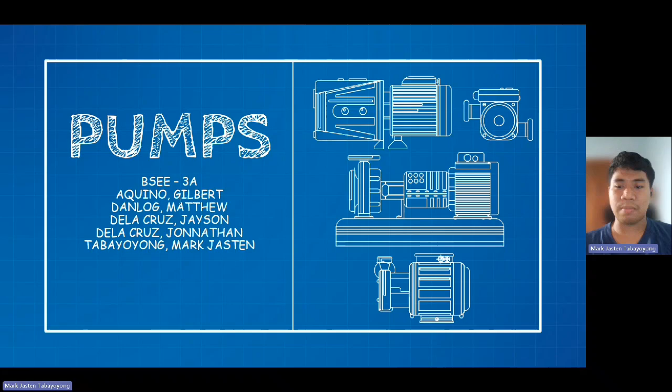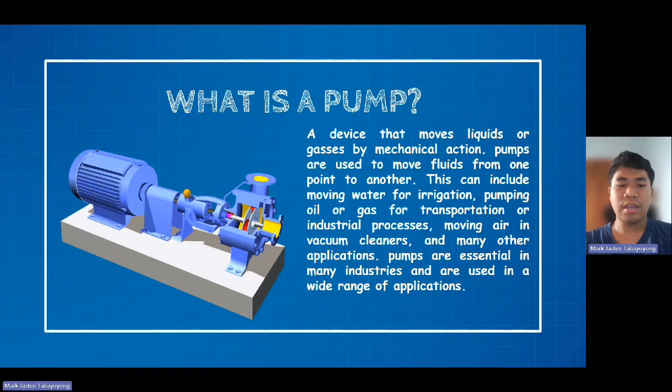So, first question, what is a pump? It is a device that moves liquids or gases by mechanical actions. Pumps are used to move fluids from one point to another. This can include moving water for irrigation, pumping oil or gas for transportation or industrial processes, moving air in vacuum cleaners, and many other applications. Pumps are essential in many industries and are used in a wide range of applications.

So we'll now go to the types of pumps. There are two types of pumps: one is positive displacement pumps, and the second one is dynamic pumps. In positive displacement pumps, we have two kinds, which is rotary and reciprocating. In rotary, there are three kinds, which is gear, screw, and rotary vane. While in reciprocating, there are three kinds also, which are plunger, diaphragm, and piston.

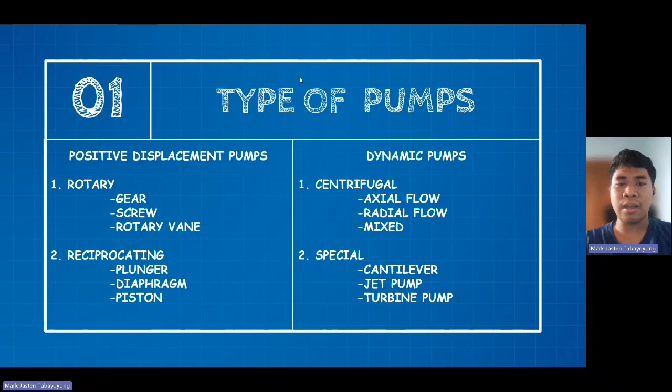So we'll now go to dynamic pumps. There are two kinds also, the centrifugal and special. In centrifugal, we have axial flow, radial flow, and mix. In special, we have cantilever, jet pump, and turbine pump. So all of this that I stated earlier will be discussed more thoroughly throughout the presentation.

So in positive displacement pumps, it works by trapping a fixed amount of fluid and then forcing that trapped volume into the discharge pipe. Think of it like filling a cup with water and then pouring the water into a pipe. So every time the pump operates, it traps the same amount of fluids and moves it along.

What's fascinating about this pump is that they can theoretically produce the same rate at a given speed no matter what the discharge pressure is. This means if the pump is running at a constant speed, it will deliver a constant amount of fluid regardless of how much resistance or pressure it faces in the discharge pipe. This is why positive displacement pumps are often called constant flow machines.

Here is a simple analogy. Imagine you're using a hand pump to fill a balloon. Every stroke of the pump traps a certain amount of air and pushes it into the balloon. No matter how much the balloon resists due to the air pressure inside it, each stroke of the pump will push the same amount of air as long as you pump at the same speed.

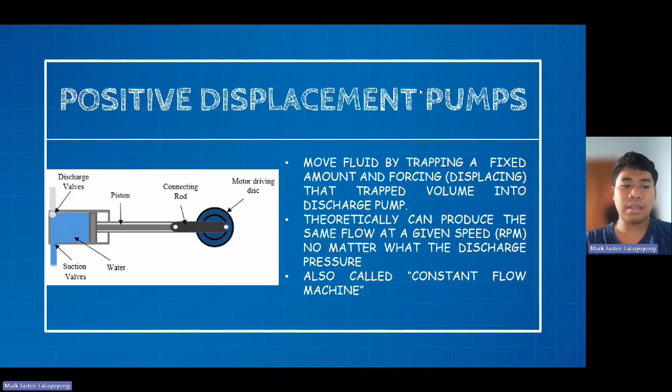So positive displacement pumps are used in many applications where a steady, reliable inflow is needed, such as in oil and gas pipelines, chemical processing, and even in medical devices.

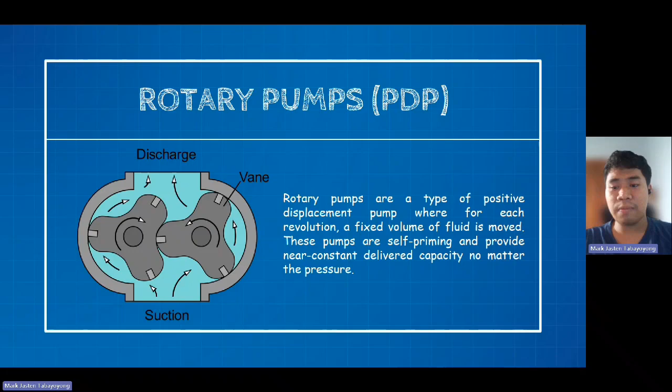We will now go to rotary pumps. Rotary pumps are a type of positive displacement pump where for each revolution a fixed volume of fluid is moved. These pumps are self-priming and provide near constant delivery capacity no matter the pressure.

These pumps are designed with very small clearance, tight clearance, between its rotating and stationary parts in order to minimize leakage from the discharge side to the suction side, as they are designed to operate at relatively slow speeds to maintain this clearance.

When operated at higher speed, they are susceptible to erosion and excessive wear, which result in larger clearances and decrease in pumping capacity. So, rotary pumps are commonly used for pumping high viscosity liquids such as oil, including in handling lube or fuel oil in engine rooms.

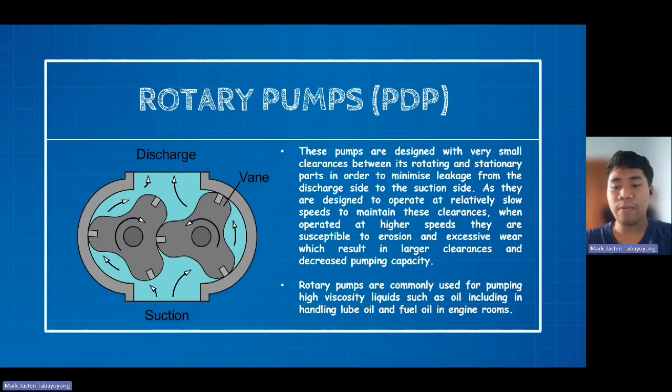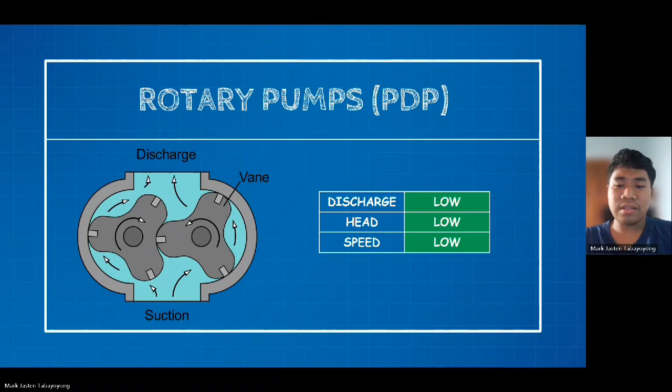So there are three characteristics of rotary pumps. In discharge, it is low. In head, it is low, and speed is low.

Next is reciprocating pumps in positive displacement pumps. It uses a piston and cylinder arrangement with suction and discharge valves integrated into the pump, commonly used as a boiler feed pump for steam, and can be double acting or single acting.

As it's said, piston pumps can be either single acting or double acting. In single acting, the pump moves fluid only during one part of the piston cycle, either forward or backward. In double acting, the pump moves fluid during both parts of the piston cycle, both forward and backward.

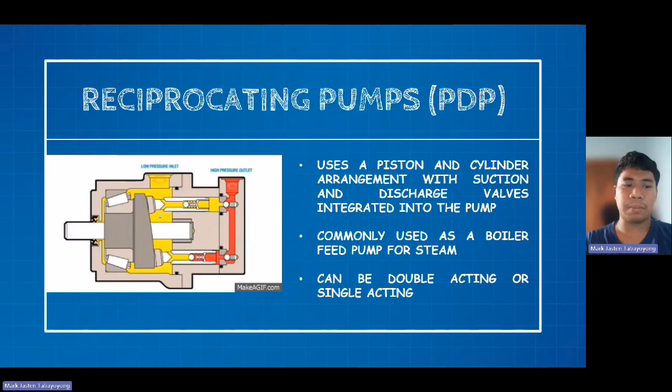These pumps are commonly used as boiler feed pumps for steam engines. In this application, they pump water into the boiler to produce steam, which then powers generators, engines, or turbines. The reliability and efficiency of piston pumps make them ideal for this purpose. It also has three characteristics: discharge is low, head is high, and speed is low.

For centrifugal pumps or dynamic pumps, these types of pumps generate high rotational velocities and then convert the resulting kinetic energy of the liquid to pressure energy. It contains an impeller and casing.

In centrifugal pumps, it moves the liquid by generating high rotational speed and converting that speed into pressure. A centrifugal pump moves liquids by generating high rotational speeds and converting that speed into pressure.

At the heart of a centrifugal pump is an impeller, a rotating component with blades. When the pump is turned on, the impeller spins rapidly. As the impeller spins, it creates high rotational velocities, and this action imparts kinetic energy to the liquid inside the pump.

The fast-moving liquid is then directed to the outer edges of the impeller and into the pump casing. The pump casing is designed to capture this kinetic energy and convert it into pressure energy. As the liquid slows down in the casing, the kinetic energy is transformed into pressure, which forces the liquid out of the pump and into the discharge pipe.

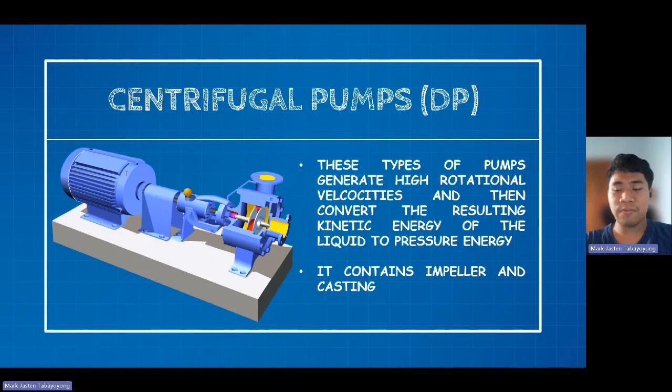Centrifugal pumps are essential in many applications because they can handle large volumes of liquids and generate high pressures efficiently. They are commonly used in water supply systems, industrial processes, and HVAC systems. We have a characteristic: first, the discharge, which is very high. The pressure head is low, and the speed or pump speed is high.

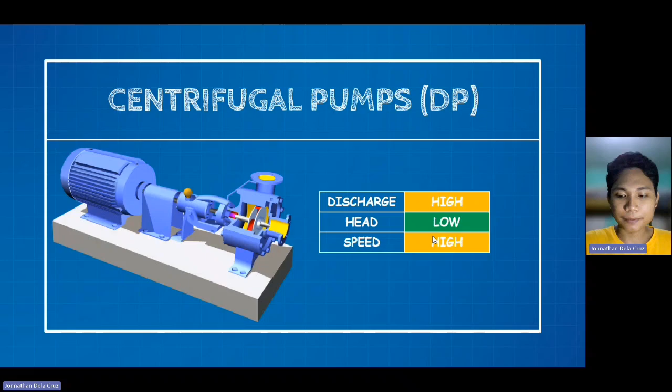We have different types of centrifugal pumps. We have radial: in radial, discharge is radial or tangential along the outer radius of the pump casing, with a 90 degree turn outward. In the radial flow centrifugal pump, the fluid enters at the center of the impeller and is discharged radially. It has the characteristic of being perpendicular to the shaft and has a high pressure output.

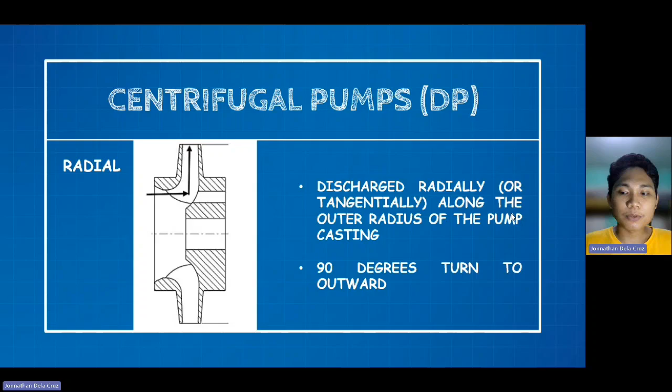It is suitable for high pressure applications with relatively low flow rates. This type of centrifugal pump might be used in the boiler feed system to pump water into the boiler at high pressure.

In the axial flow, the fluid enters and leaves axially, that is also parallel. In the axial flow centrifugal pump, the fluid moves parallel to the pump shaft, similar to the way a propeller works. It has a lower pressure compared to radial pumps.

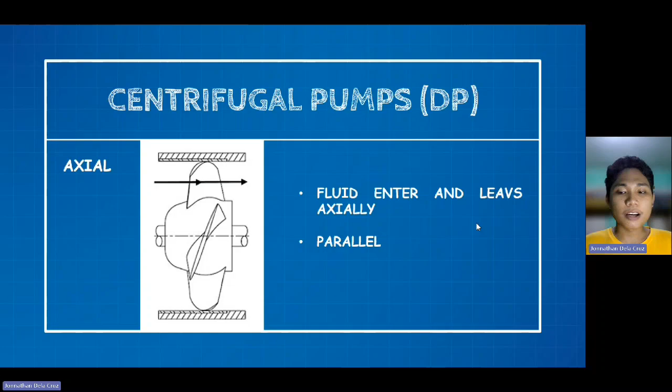It is ideal for applications requiring high flow rates with low pressure rise. It is also often used in flood control, irrigation, and sewage treatment plants, where large volumes of fluid need to be moved.

Next is mixed flow, which is intermediate between radial and axial, at some angle between radial and axial. This type of centrifugal pump combines features of both radial and axial flow pumps. The fluid enters the impeller axially and is discharged at an angle, combining both radial and axial flow characteristics.

This application is versatile and suitable, such as for cooling water pumps and industrial processes. It is also used in water treatment plants where a balance between high flow rates and moderate pressure is needed.

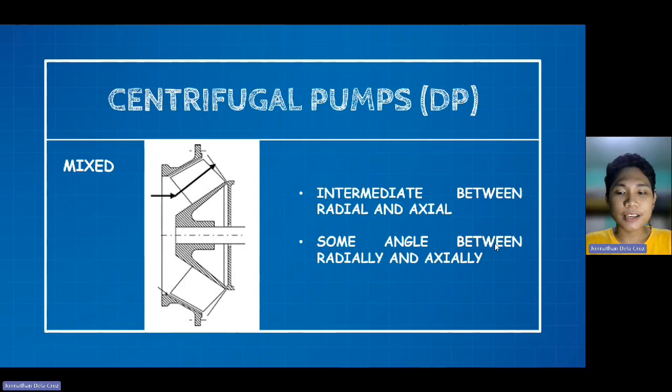Next, we're going to differentiate the positive displacement pump and centrifugal pump, first on their working mechanism. On the positive displacement pump, they pull fluid into a compartment at the inlet and move it to an outlet for discharge using a rotary, reciprocating, or diaphragm method to move the fluid.

While the centrifugal pump, an impeller rotates in the housing, reducing pressure at the inlet. This brings fluid to the outside of the pump's housing, increasing the pressure enough to push it out of the discharge.

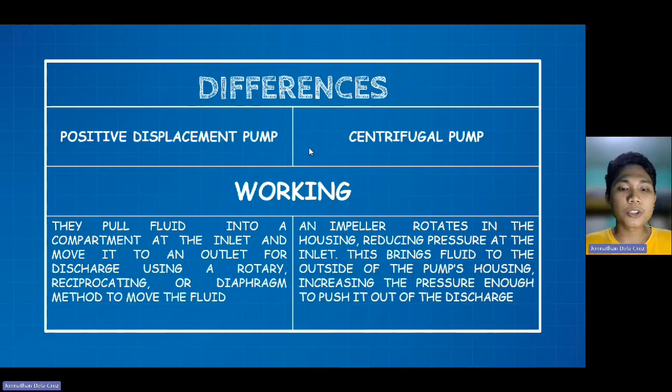Next is the flow rate. The flow rate of the positive displacement pump is fixed. They will move fluid at the same speed regardless of pressure in the inlet. While the centrifugal pump has a variable flow rate, they will move fluid at different speeds depending on the pressure.

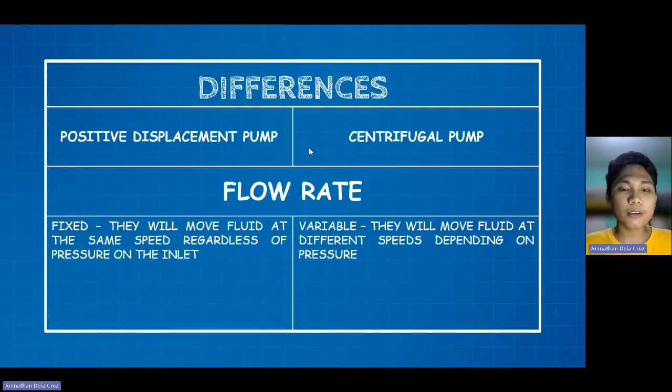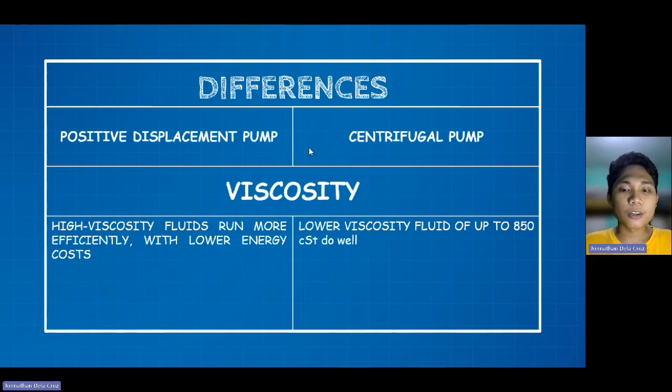While on the viscosity, the positive displacement pump has high viscosity fluids run more efficiently with lower energy cost, while on the centrifugal pump, lower viscosity fluid of up to 850 centistoke do well.

While under application, positive displacement pumps do well in complex applications like those involving suction lift. They create a vacuum on the inlet and can reach vacuums of 25 to 28 inches mercury, a great choice for the lift.

While on the centrifugal pump, a simple application like water pump at 1000 GPM with no back pressure. They are cheap and efficient. Some self-priming pumps can lift liquid to 13-inch mercury vacuum.

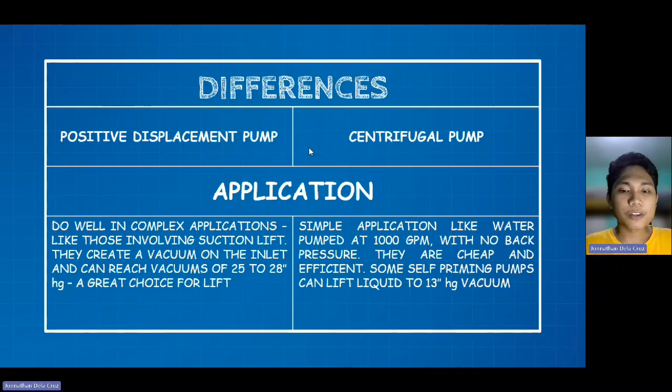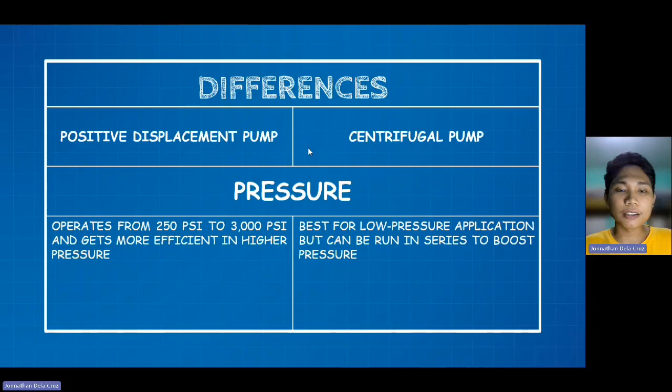While on the pressure, positive displacement pump operates from 250 psi to 3000 psi and gets more efficient in higher pressure. While on the centrifugal pump, best for low pressure application but can be run in series to boost pressure.

Good day, guys. For this section, I will be discussing the different hydraulic variables.

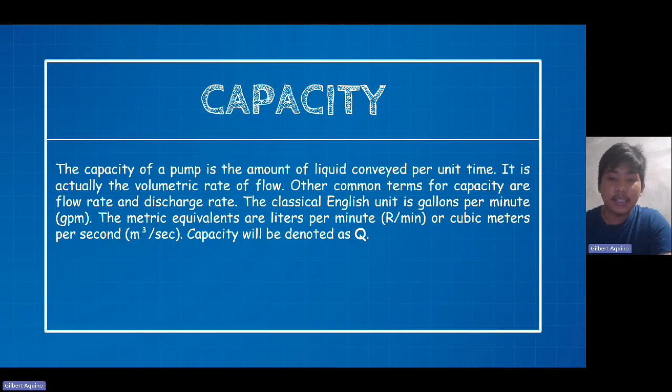Para sa last na hydraulic variable, we have the efficiency. Ang efficiency ay ratio ng output power sa input power. Physically, efficiency describe or measure yung mga losses ng isang system.

Kung alam nyo yung law of conservation of energy, para siyang contradictory dito, di ba? Pero sa real world, lahat ng physical system ay may mga inherent na losses. So kapag mas malaki yung efficiency, mas okay yung pump, kasi wala siyang masyadong system losses. Pero it will never reach 100%, kasi wala namang perfect na system, lahat may losses.

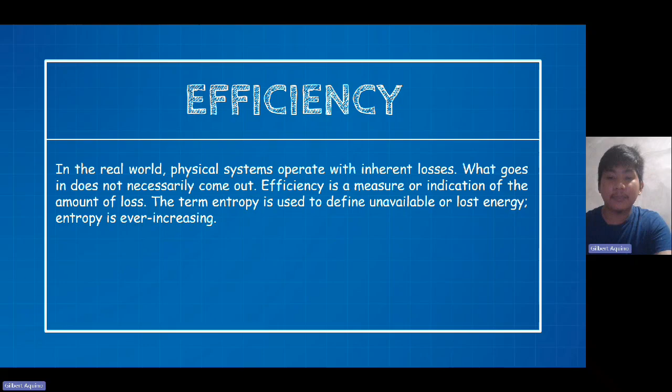Okay, so for this section, we will discuss the rotational variables found in pumps, centrifugal pump, axial pump, or any pump na pwede natin gamitin. Specifically, we will define the power, rotation speed, and impeller diameter. Mamaya sa affinity laws, malalaman natin on how these variables are interconnected. Now, what will happen if there's a change in one variable? What will happen to the other variable? For example, nag-change si speed, nag-increase or nag-decrease, what will happen to the power? What will happen to the head? And what will happen to the flow rate? Mga ganun, mamaya sa affinity laws.

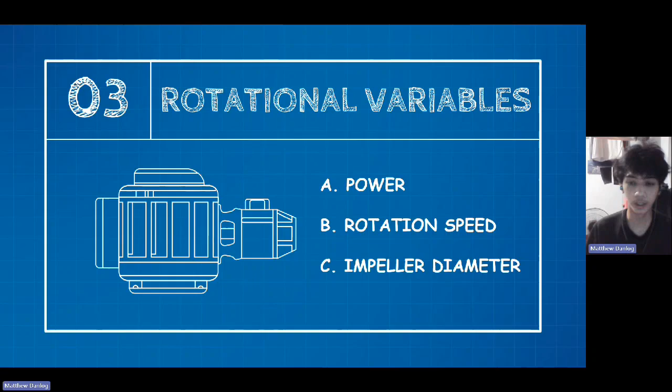Dito sa section na to, i-define lang natin yung mga variables na to. So first, we have the power. In physics, power is defined as work per unit time. In the field of engineering, power is defined as the ability to do work. Units for power are the horsepower and the kilowatt.

So these units are very familiar when you are studying electrical engineering. 1 horsepower is equals to 746 watts. With centrifugal pumps, we deal with the former. The unit of horsepower is commonly used interchangeably with and taken to mean the variable of power. Kasi sa mga binibili nating pumps, motors, fuel pump, meron silang nameplate. Sa nameplate, naka-indicate doon yung power output, yung frequency, yung terminal voltage, yung speed. Ito yung magiging guide ng user, ng operator, ng buyer para mas maging efficient yung paggamit niya sa nabili niyang equipment.

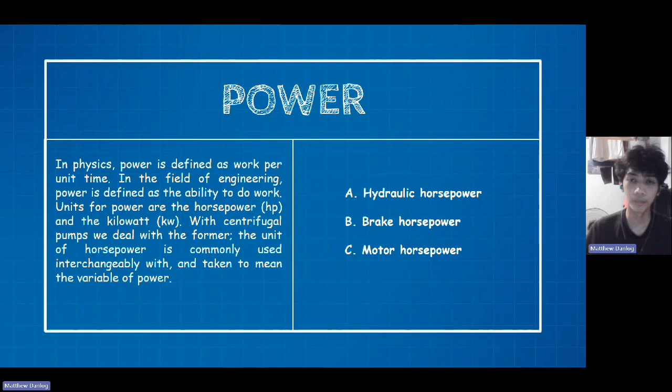So let's define, there are 3 types of power: A, hydraulic horsepower, B, brake horsepower, and C, motor horsepower. We will differentiate these 3.

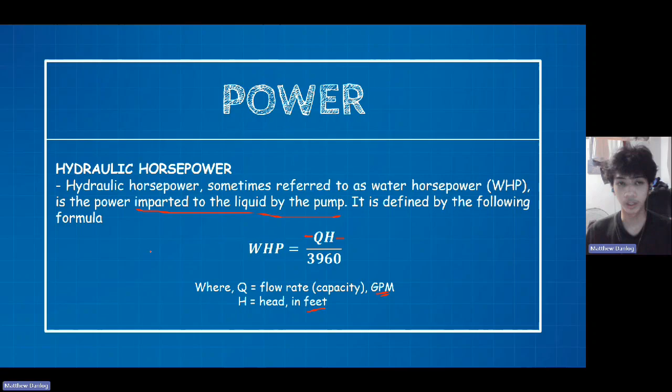So for hydraulic horsepower, sometimes referred to as the water horsepower, is the power imparted to the liquid by the pump. It is defined by the following formula: hydraulic horsepower is equals to the flow rate times the head, QH over 3960, wherein dapat yung Q natin is naka-GPM or gallons per minute at yung head natin is in feet. So kung nabigyan tayo ng flow rate na naka-cubic meter per second, kailangan pa nating convert yun sa GPM para magamit tong formula na to.

So kung we will compare this formula sa nakasanayan natin, wherein ang efficiency is equals to the output power over the input power, we will compare si P out, basically the water horsepower.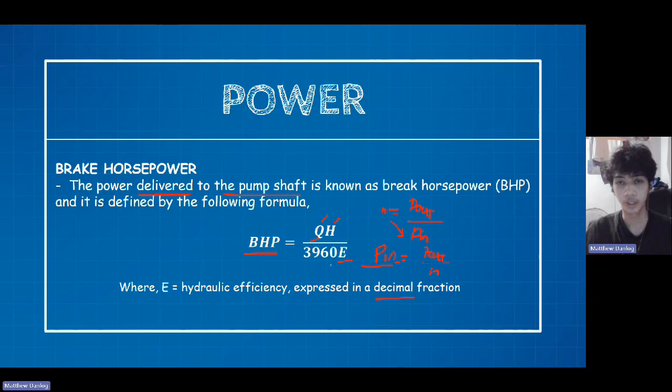So kung we will compare this, yung nakasanayan nating formula na efficiency is equals to the P out, power output over the P in, cross multiply, lagay natin si P in dito, P out over the efficiency. So basically, yung brake horsepower is the P input. So pwede nating i-conclude na yung brake horsepower is the power before yung mga losses. Kasi sa centrifugal pump, hindi mawawala pa rin yung mga resistances na present doon, at may mga losses pa rin. Hindi magiging 100% efficient yung pag-transfer ng power.

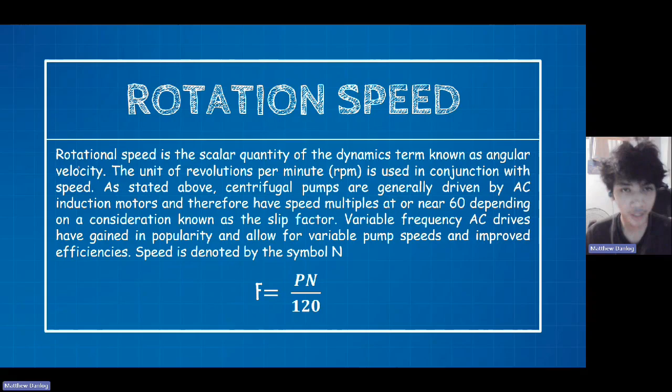So ano tong slip factor? Slip factor is associated with the induction motors.

So ang slip factor is the deviation or yung pagkakaiba from the theoretical speed to the actual speed. Kasi 'pag ginamit natin yung motor, kahit naka-indicate dun sa nameplate yung synchronous speed, kapag sinaksak natin yan, due to many factors, yung actual speed ay hindi siya magiging parehas dun sa mismong synchronous speed. Yun lang yung ginagamit sa slip factor.

So, meron namang formula for slip factor: the synchronous speed minus the actual speed, over the synchronous speed. Yan yung slip factor. And madalas, ang tawag dito, ang unit nito is in percentage unit.

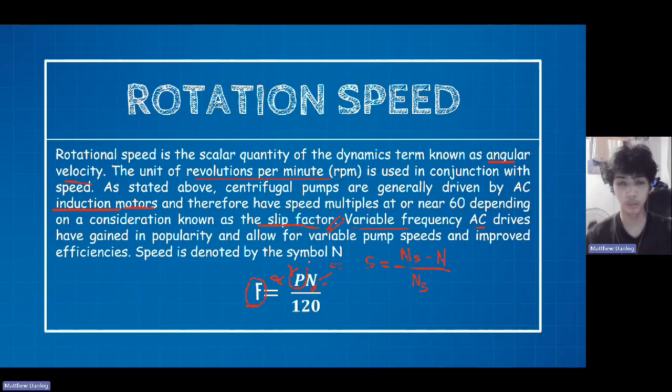Important term na yung speed is denoted by the symbol N. Kung nag-aaral kayo ng EE, madalas nagagamit rin yung symbol N sa transformer, yung number of turns. So, be careful lang dun.

Okay? For impeller diameter naman, impeller diameter is the simplest variable to define. Construction na to ng centrifugal pump. Impellers are essentially these, makikita nyo dito, essentially discs with outwardly radiating vanes, which when rotated impart the motive centrifugal hydraulic force to the fluid being pumped. The impeller is mounted on the pump shaft. Andito siya. Okay.

Now, and within the pump's casing, ito yung casing. Okay. Centrifugal pump casings are fabricated to accept a given maximum impeller diameter, allowing for hydraulic clearance to facilitate fluid motion to the pump discharge point.

So, common sense naman na dapat is mas maliit yung maximum impeller kaysa dun sa centrifugal pump casing natin, kasi nga iikot yung impeller natin para makapag-flow ng fluid. Kung mas malaki yung impeller, sasayad dun sa mismong casing, hindi aandar yung mismong motor natin. So, dapat naka-match yung centrifugal pump casing natin dun sa size ng diameter, radius ng impeller, diameter ng impeller, para makapag-perform ng fluid motion to the discharge point.

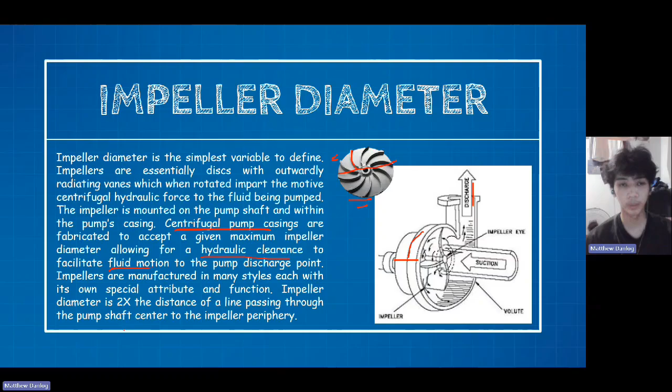Impellers are manufactured in many styles, each with its own special attribute and function. Hindi lang ganito yung construction ng ating impeller, marami pang style na pwede nating i-search. So, impeller diameter is 2 times the distance of a line passing through the pump shaft center to the impeller periphery.

Okay? So, next, na pwede nating makuha kapag bibili tayo ng pump is the pump performance curve. Maybe available sa internet or sa mismong pinagbibilhan natin. So, sa centrifugal pumps, basic parameters are plotted on manufacturer's performance curve. Inibigay ni manufacturer to. And the data generated is produced by conducting operational tests of the pump with water.

The presentation of this parameter is somewhat standardized on a rectangular coordinate plane. Yan, coordinate plane. Okay? Makikita naman natin ito mamaya sa may picture naman mapapakita mamaya. The ordinate axis or the y-axis usually serves as a dual role of head and brake horsepower, while the abscissa or the x-axis accommodates the capacity or yung flow rate natin.

So, performance curves are generated for constant speed and multiple impeller diameters. Makikita pa rin natin ito mamaya, represented as a family of essentially parallel decaying parabolic plots, characterizing the relationship of head versus flow.

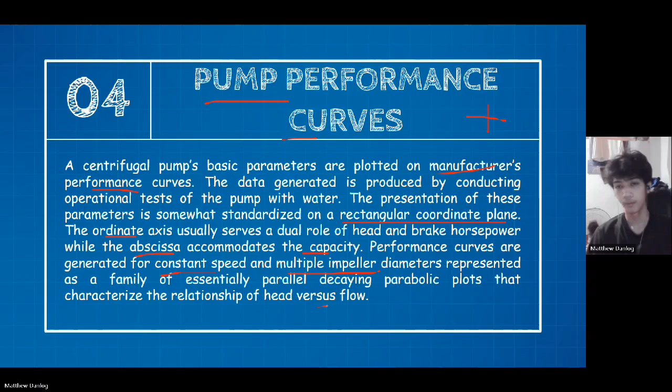Para mas maliwanagan tayo, andito yung example ng ating pump curve. Merong constant speed. So, based sa curve, may makikita tayong efficiency. So, nasan si efficiency? Andito. Ayan. Yan yung mga efficiency.

This line follows the efficiency curve. Line or curve, so BHP is here - brake horsepower, here. You can see that per brake horsepower, it also has a curve like that. Okay? We can also see here the impeller diameter, which is in inches: 7 inch, 7.5 inch, 8 inch. And this still matches with the curve here.

Also, in this plot, we also have NPSHR, or what we call the net positive suction head required. So it's here - this line follows the NPSHR. In terms of net positive suction head required, this is a different topic wherein our motor should be higher, or should meet this net positive suction head required, so that it doesn't form cavitation or holes, so that the pump doesn't get damaged immediately.

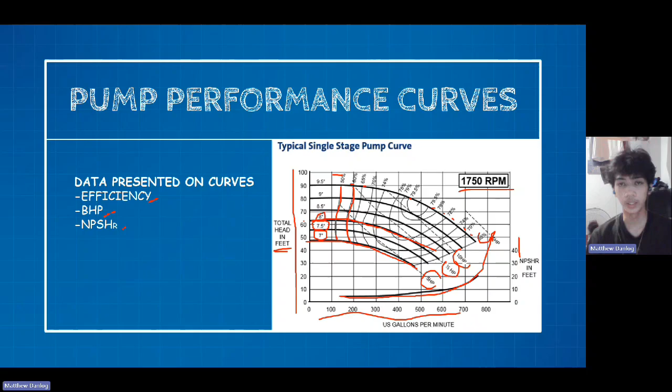Now for affinity laws, there are two different sets. First is based on the diameter of the impeller, where D is equal to C, or the diameter is assigned as a constant. Next, for the second set, it depends on the speed, where N is equal to C, where the speed is assigned as a constant.

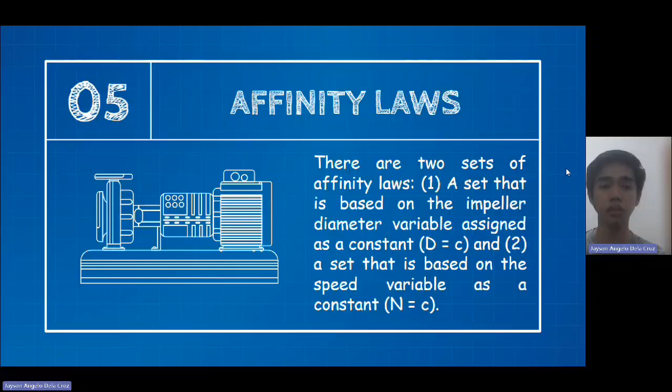For set 1, we have the volumetric flow rate directly proportional to the speed. The head is directly proportional to the square of the speed. The power is directly proportional to the cube of the speed. With that said, Q1 over Q2 equals speed 1 over speed 2. Head 1 over head 2 equals the square of speed 1 over speed 2. Power 1 over power 2 equals the cube of speed 1 over speed 2.

The second set: the volumetric flow rate is directly proportional to the cube of the diameter. The head is directly proportional to the square of the diameter. And the power is directly proportional to the diameter raised to 5. With that said, Q1 over Q2 equals the cube of diameter 1 over diameter 2. Head 1 over head 2 equals the square of diameter 1 over diameter 2. And in terms of power, power 1 divided by power 2 equals diameter 1 over diameter 2 raised to 5.

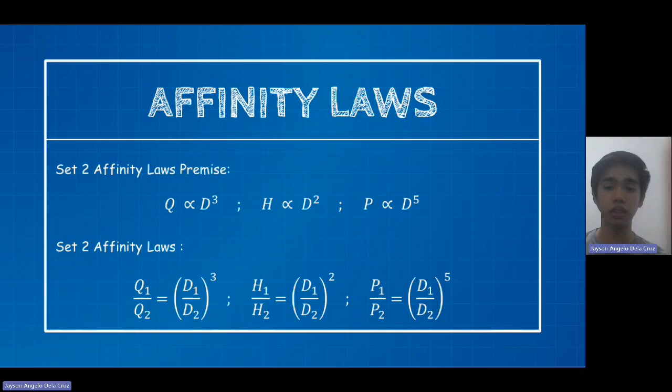Raised to 5. Now, if both speed and diameter vary in value, meaning they both changed, we have Q1 over Q2 equals speed 1 over speed 2 multiplied by the cube of diameter 1 over diameter 2. In terms of head, head 1 over head 2 equals the square of speed 1 over speed 2 multiplied by the square of diameter 1 over diameter 2. In terms of power, power 1 over power 2 equals the cube of speed 1 over speed 2 multiplied by diameter 1 over diameter 2 raised to 5.

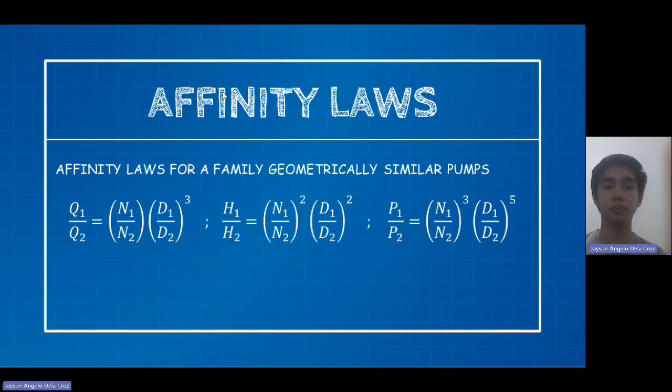After explaining the affinity laws, we are going to solve a sample problem.

Question number 1: a centrifugal pump equipped with a variable frequency or speed drive running at 3,500 RPM discharges 240 gallons per minute, corresponding with a head of 287 feet. The horsepower is 35.5. If the pump speed is reduced to 2,900 RPM, what will be the revised flow rate, head, and power required?

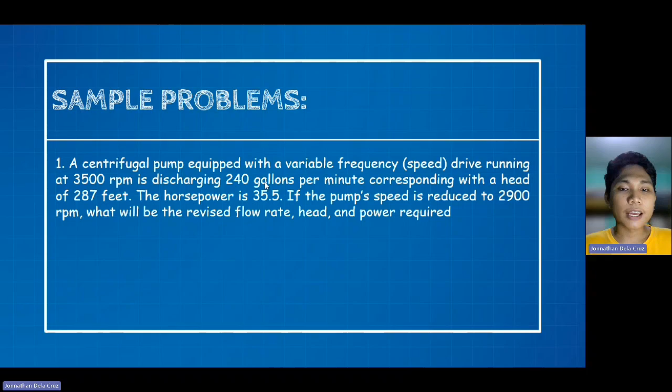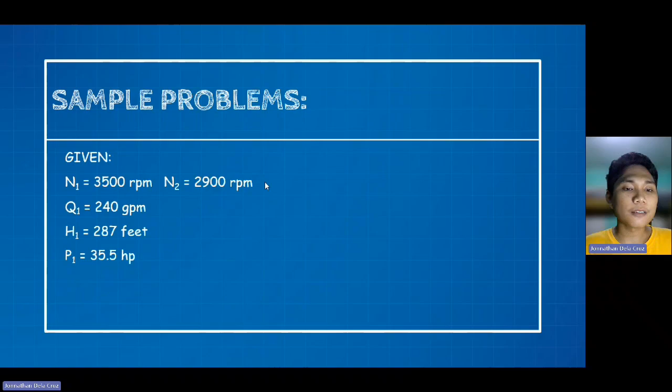Before we solve the problem, first write the given values. On the initial speed, we have 3,500 RPM, initial flow rate 240 GPM, initial head 287 feet, initial power 35.5 HP. While on the final speed, we have 2,900 RPM.

Now, let's start solving the final flow rate. So we have an equation here: Q2 equals Q1 times the quantity N2 over N1. Substitute those values and we arrive at the final flow rate: 199 GPM.

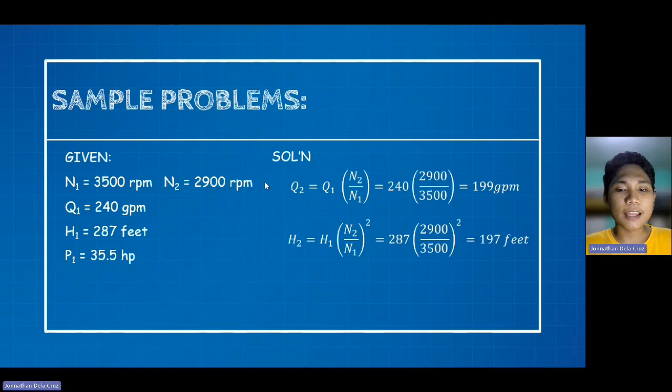While for the final head, we have the equation H2 equals H1 times the quantity N2 over N1 squared. Substitute those values and we get the final head: 197 feet.

And lastly, we have the equation P2 equals P1 times the quantity N2 over N1 cubed. Substitute those values and we can get the final power: 20.2 HP.

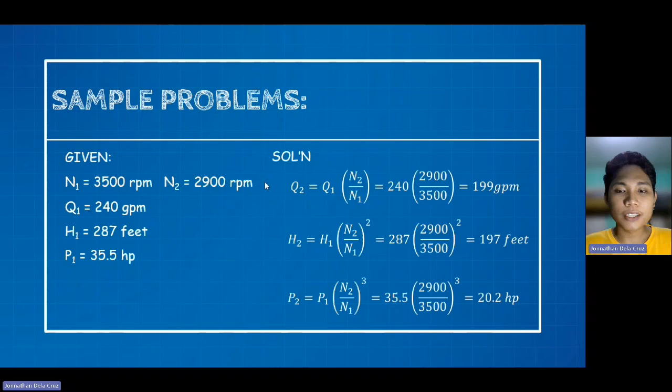For the second problem, a 4x3, 1,750 RPM centrifugal pump equipped with an 11-inch diameter impeller requires 14.3 bhp when delivering 300 GPM at a head of 111 feet. Predict the new capacity, head, and power required when the impeller diameter is reduced to 9 inches.

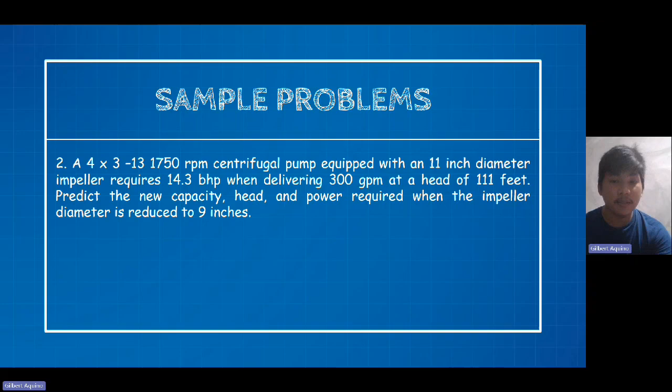So first thing first, we have to identify all the given. Given is the initial diameter equal to 11 inches and the new diameter equal to 9 inches. Given din is the initial capacity equal to 300 GPM, the head equal to 111 feet, and also the power equal to 14.3 HP.

And to compute the new capacity, head, and power, we will use the second set of affinity laws, kasi ina-assume natin na constant ang speed sa problem na ito. So para makuha ang bagong capacity, we have the formula Q1 multiplied by the quantity of D2 divided by D1 raised to 3. Substitute natin ang mga given: 300 multiplied by the quantity of 9 over 11 raised to 3. Calculating, makukuha natin ang bagong capacity na equal sa 164.3 GPM.

At para makuha naman ang bagong head, we have the formula H1 multiplied by the quantity of D2 over D1 raised to 2. Substitute natin ulit ang mga given: 111 multiplied by the quantity of 9 over 11 raised to 2. Calculating, makukuha natin ang bagong head na equal sa 74.3 feet.

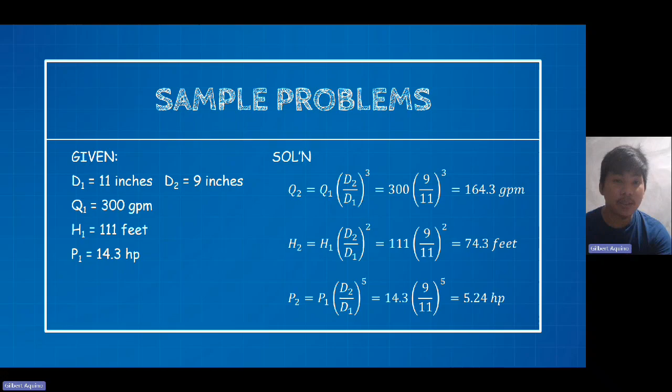For sample problem number 3, a centrifugal pump rotating at 1,200 revolutions per minute delivers a flow of 55 liters per second to 27 meters of head. If the rotating speed is increased to 1,500 revolutions per minute and the impeller diameter is increased by 10%, compute the new flow and head.

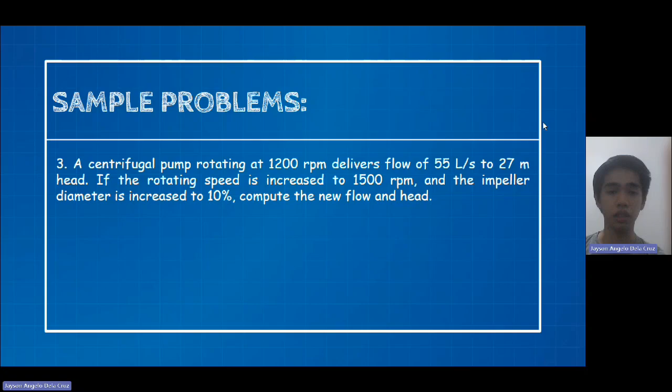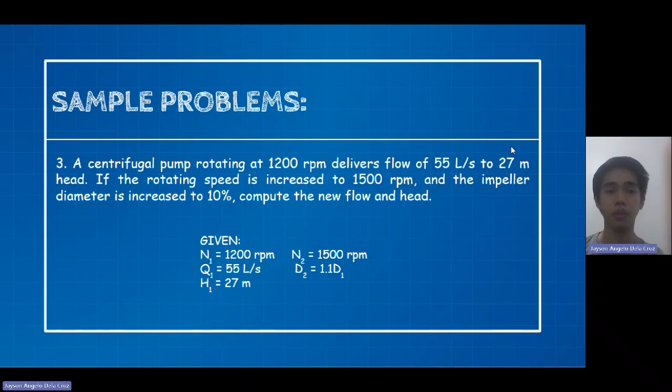So the givens are speed 1, the volumetric flow rate 1, head 1, speed 2, and diameter 2, which is equal to 1.1 times diameter 1 as mentioned in the problem. Let's proceed to the solutions.

So volumetric flow rate 2 is equal to Q1 multiplied by speed 2 over speed 1 multiplied by the cube of diameter 2 over diameter 1. Substituting the given values, you'll be getting 91.5063 liters per second.

And for head 2, it is equal to head 1 multiplied by the square of speed 2 over speed 1 multiplied by the square of diameter 2 over diameter 1. Substituting the given values, we'll be getting 51.0469 meters.

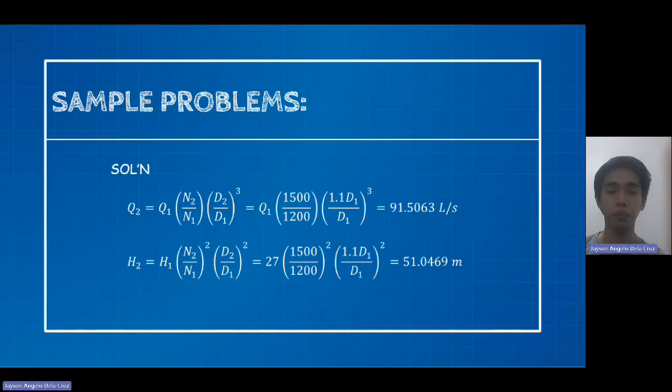So example number 4, an axial flow pump delivers 300 liters per second of water at a head of 6 meters when rotating at 2000 RPM. If its efficiency is 80%, determine the HP of power the shaft delivers to the pump. If the same pump were operated at 2400 RPM, the efficiency would increase to 83%. Determine the head, the flow rate, and the power delivered by the shaft when it operates at 2400 RPM.

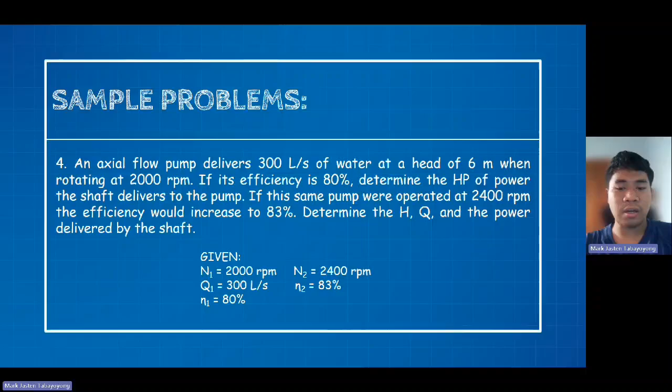So you get the given: speed 1 or N1 is equal to 2000 RPM. The flow rate 1 is equal to 300 liters per second. The efficiency of the first condition is 80%. The second speed is 2400 RPM, and the efficiency at 2400 RPM is 83%. So let's solve this problem.

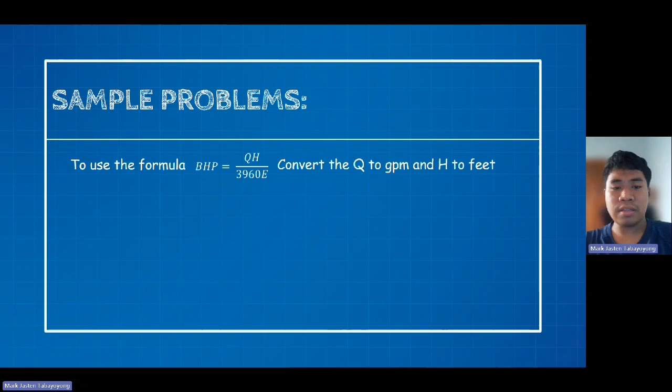So to use the formula, brake horsepower is equal to flow rate multiplied by head divided by 3960 multiplied by efficiency. So we would like to convert the flow rate to gallons per minute and the head to feet.

So to convert the liter per second, we would like to convert gallon to liter first. So in 1 gallon, it would be 3.785 liters. So we will convert the second to minute: in 60 seconds, there is 1 minute. So the liters will cancel out and the seconds will cancel out. So if you multiply this, it will result in...

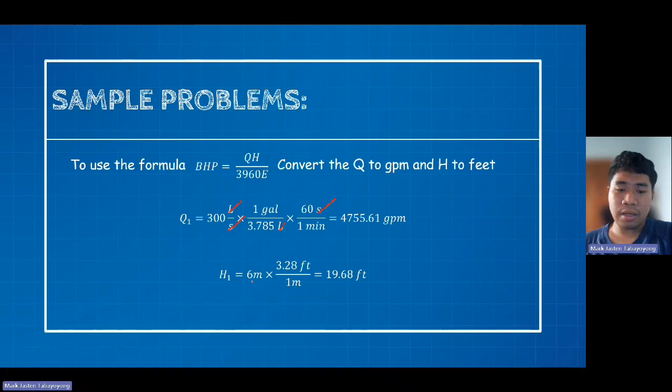4,755.61 gallons per minute. So dito naman sa head, in 1 meter, there is 3.28 feet. So magkakancel ang unit na ito, so it will result in 19.68 feet.

So sa unang power, i-multiply natin ang mga nakuha nating values na kinonvert natin sa GPM and sa feet. So 4,755.61 multiplied by 19.68 divided by 3,960 times 0.80.

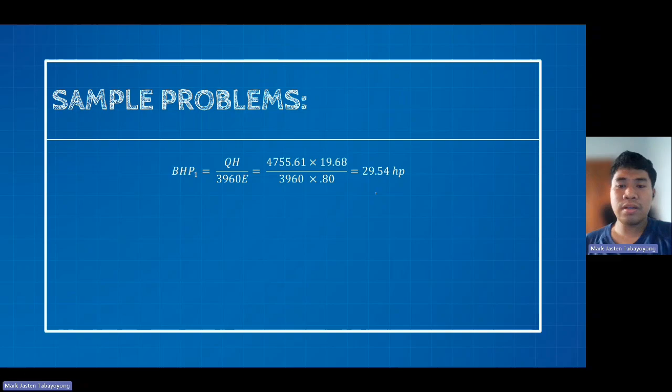So it will result in 29.54 horsepower.

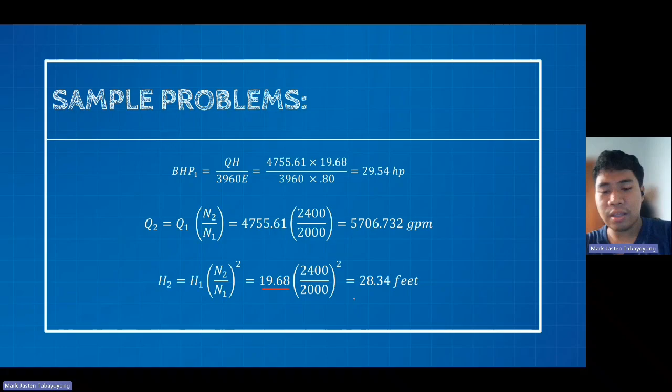To get the flow rate at the second condition of speed, we use the affinity law. The flow rate from before, 4,755.61, multiplied by the speed of the second condition which is 2,400 divided by 2,000, will result in 5,706.732 gallons per minute. For the head, the first head we got earlier is multiplied by the ratio of the speed of the second condition to the speed of the first condition, squared. So we get 28.34 feet.

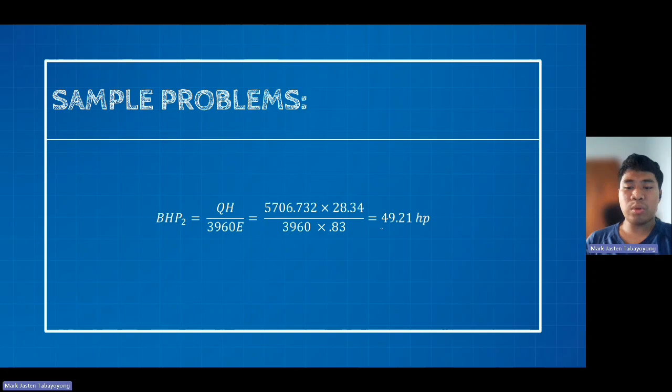And for the second power, we take the two new values, flow rate and head, and put them in the brake horsepower formula: 5,706.732 multiplied by 28.34, divided by 3,960, times 0.83. So it will result in 49.21 horsepower. That's it for example number 4.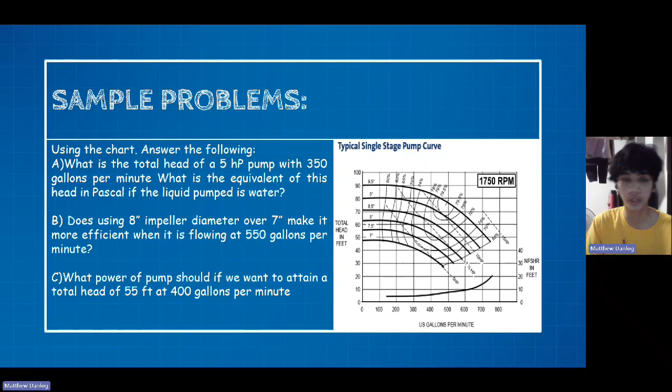For letter A, from the question, let's find the 5 HP curve on the graph. So 5 HP, where is its curve? Here it is. And for 350 gallons per minute, let's find the head where the 5 HP power also delivers a flow rate of 350 GPM.

So where is 350 GPM? It's in between 300 and 400. Let's plot that. We take the curve for 5 HP, then plot the 350 GPM.

So there it is. Now what is the equivalent of this head? Let's plot it on the y-axis for total head in feet. You can see on the left side, in their plotting, it falls in the range of 30 and 40 — this is a matter of approximation and estimation. It's closer to 40, so we can conclude the head is 38 feet.

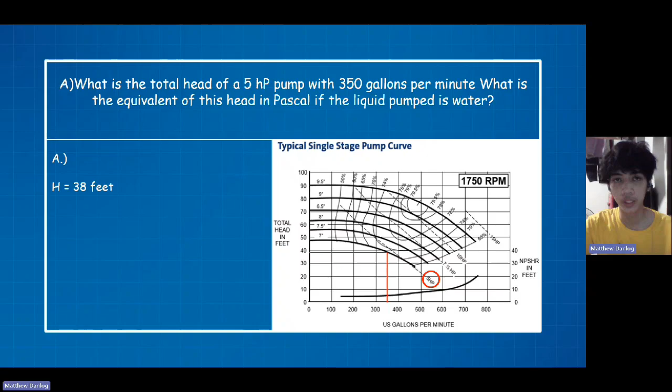Now, another question: what is the equivalent head of this pump in Pascal if the liquid being pumped is water? We have a formula for computing pressure in Pascal. When we say Pascal, that's Newton per meter square. The head we got is 38 feet, which is in English units, so we need to convert it to meters.

So the formula for computing pressure will be rho*g*h, or density multiplied by gravity times the height in meters. For the density, since water is in normal condition, we use 1,000 kilogram per meter cube, times 9.81, times the 38 feet converted to meters. We get a pressure of...

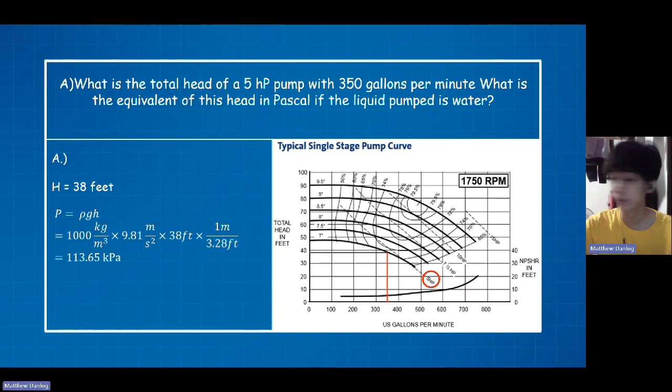113.65 kilopascal. For letter B: using an 8-inch impeller diameter over a 7-inch, which makes it more efficient when flowing at 550 gallons per minute? On the graph, let's find the 7-inch and 8-inch curves. So where are they? Here's the 7-inch, here's the 8-inch. Where is 550 GPM? It's in the middle of 500 and 600.

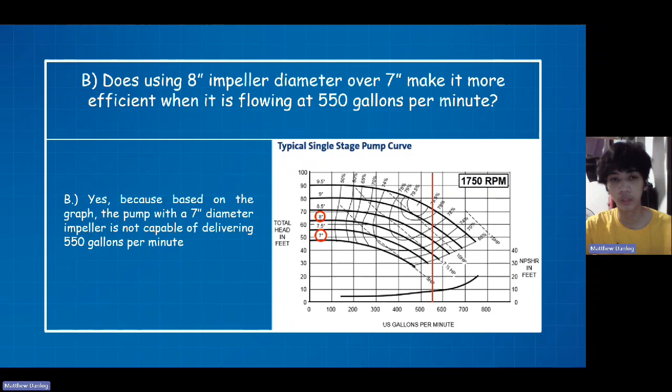Let's plot that. We can see that when using a 7-inch impeller diameter, it doesn't reach 550 GPM. But if we use an 8-inch impeller diameter, it can supply and produce a flow rate of 550 GPM. So we can conclude that it is more efficient to use the 8-inch impeller diameter, because based on the graph, the pump with a 7-inch diameter impeller is not capable of delivering 550 GPM.

Last question: what power of pump should we use to attain a total head of 55 feet at 400 GPM? Let's plot these two variables again. We'll mark 400 GPM and 55 feet. For 55 feet, it's here. For 400 GPM, it's here. So where do they meet?

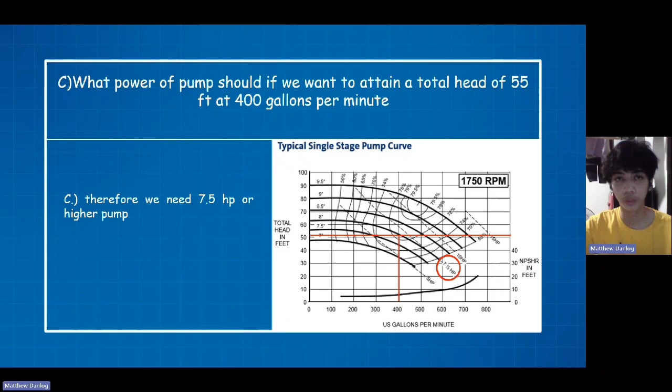It lands on the 7.5 HP curve. So we can conclude that we need a pump with a power of 7.5 horsepower or higher to achieve a total head of 55 feet at a flow rate of 400 GPM. And that's all. Thank you.